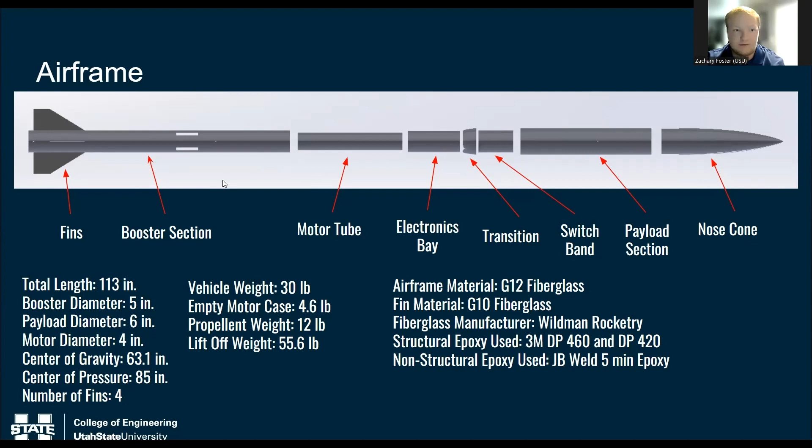And are you talking an actual 2-part epoxy with JB Weld, or those 2-piece putties that they sell as well? It's a 2-part epoxy. Okay, fair enough. All right, moving on to our fins. We'll show a picture of the fins later. Jorge, well, we can show them now. Jorge got onto the call.

Our fins are through the wall mounted. We machined slots into our fiberglass tube on a 3-axis mill to ensure that all the fins are aligned properly. The root chord of the fin is 12 inches long, tip chord is 4 inches long, the semi-span is 5 inches, and the total tang inside the airframe is 5.7 inches long. The tang goes the whole width of the fin, and it is sandwiched between 2 bulkheads to ensure that they don't move.

Internal fillets were done by drilling holes into the airframe and injecting the epoxy using a syringe type of tool, and then the holes were later filled with the same epoxy. All of our fiberglass components were first wiped down using soap and water, and then with acetone. Then they were sanded to 220 grit, and cleaned again with acetone right before the epoxy was applied.

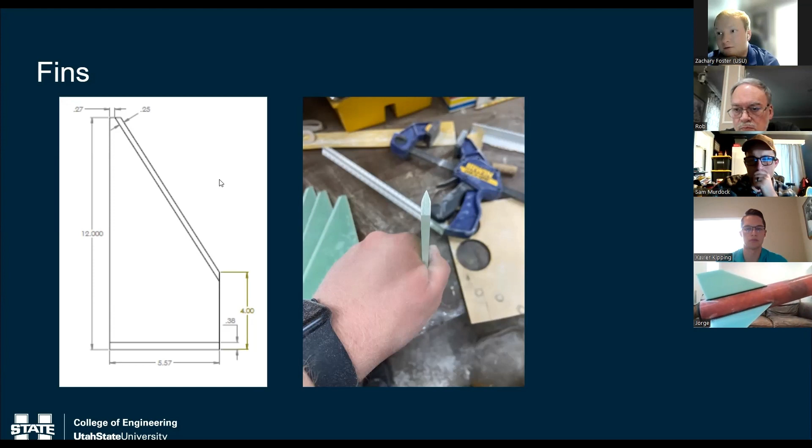Those are quarter-inch fillets on the outside, made of the same 3M epoxy we spoke of previously. There are two formulations: a non-sag formulation and a regular formulation, which are the same thing but one is thicker. The internal stuff was done with the less viscous mixture, and the outers were done with the non-sag, higher viscosity formulation. We didn't add any filler ourselves, but the manufacturer did.

Very nice, that looks good. Can I see the retainer please? The back end where the motor goes in, Jorge. Our retainer is an Aeropack retainer, a bolt-in retainer.

Have you tried to actually fit your motor case in yet? We have a loaner casing that we can use, but we haven't picked it up yet. We do have propellant in hand. We're just using a loaner casing because unfortunately our actual casing did not arrive in time.

Did you by any chance use an Aeropack retainer on your level 3 rocket? I did. Did you have any trouble fitting the motor? No, sir. I have found, having used a lot of Aeropack retainers, that when you tighten those bolts down it tends to shift the retainer a little bit out of line. So make sure you bring along to the competition whatever Allen wrench you'll need to loosen those a half turn if you need to.

So the bolts actually are not removable? The Aeropack retainer actually has a twist knob. If you could untwist it, Jorge, and show him the retainer, and take the cap off. There's a twist cap on the outside, and then the retainer is bolted onto the back.

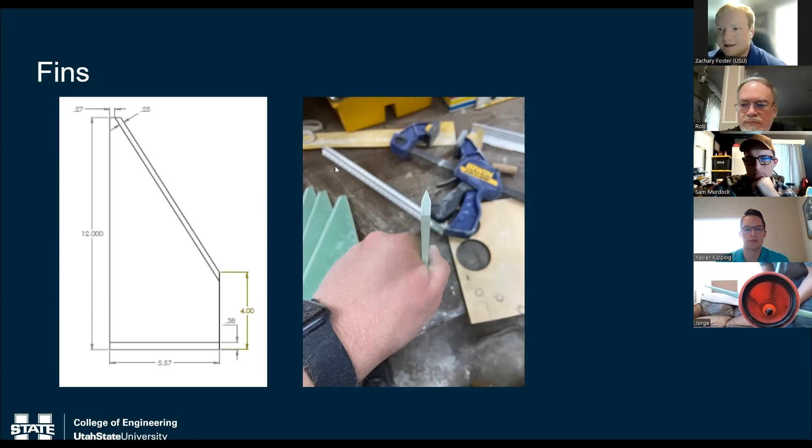For our fin flutter analysis, we just used the fin flutter boundary equation. I recognize there are other methods of calculating fin flutter boundary that probably give a little higher fidelity, and if you were pushing the boundaries you might want a second analysis. But since you're at 38% of your flutter speed, I think you're fine with this. Yep, that's the same conclusion we came to as well.

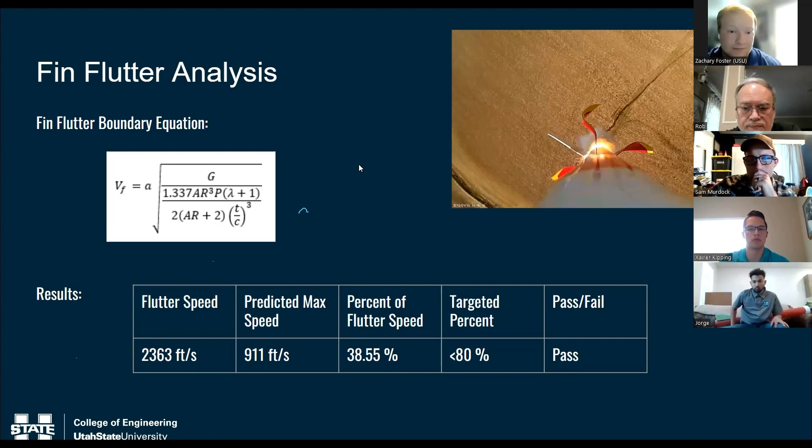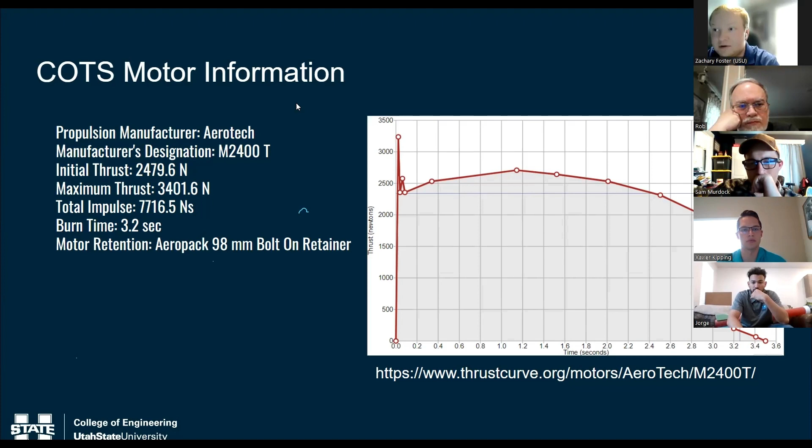We are using a commercial off-the-shelf motor manufactured by Aerotech. The specs are shown below: it's an M2400, a 98 millimeter motor. We do have our motor propellant. We are using a loaner casing, and hopefully our actual casing arrives in time, but we do have a backup in case that doesn't happen.

Going on to our flight simulation, we used OpenRocket as well, but all of our flight data came from RASAero. I used RASAero on my level 3 and was able to corroborate the data, getting within 5% of the simulated flight. So I have a high level of trust with RASAero, but as before, they are just simulations.

This is a nominal case. Our apogee is expected to be about 11,000 feet. Maximum velocity is 991 feet per second, maximum acceleration is about 10 Gs. Minimum stability is shown in the stability graph on the bottom right, and our minimum stability is 2.15, then after motor burnout it's just shy of 3. Our thrust to weight ratio is 9.87, and our rail velocity is 100.3 feet per second.

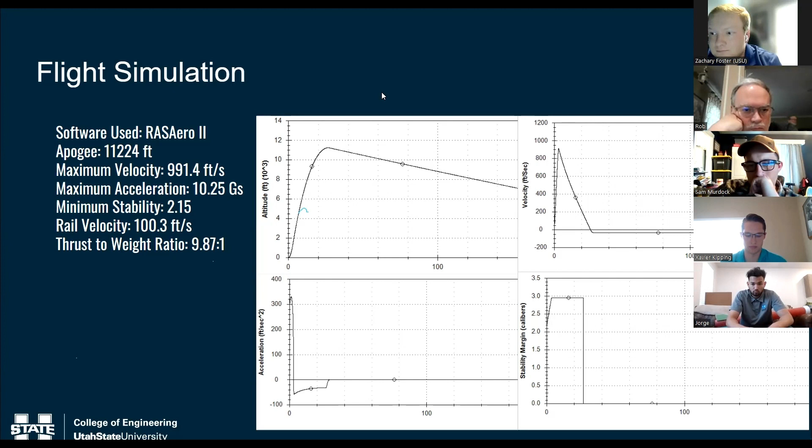Moving on to recovery. For our drogue, we are using a Rocketman 4-foot parachute. It's got a drag coefficient of 0.97. The drogue descent rate is about 60 feet per second.

We don't have the recovery harness installed into the rocket yet, it's in my storage unit, but all of our quick links are going to be 3/8. We are going to be using a swivel going from the shock cord to the parachute, as per the requirements from the DTEG.

Our primary flight computer is a MissileWorks RRC2 Plus. I've used this flight computer many times, it's my primary flight computer on all of my flights. It's very easy plug and play, very simple to wire.

The main parachute is also a Rocketman parachute, 14 feet in diameter, also with a drag coefficient of 0.97. The main descent rate is 14.5 feet per second. Our shock cord is rated to 2,000 pounds, made of Kevlar.

Kevlar was chosen because it has high strength, and it also can handle the ejection charges. So we don't have to worry, for example with nylon, about the shock cord melting due to the ejection charges.

Our secondary flight computer is also a MissileWorks RRC2 Plus, and our wiring diagram is shown below. Both systems are electronically isolated from each other, so they're fully independent of each other. We are using a Lab Rat Rocketry pull pin switch. I've used this on several projects and had good success with it.

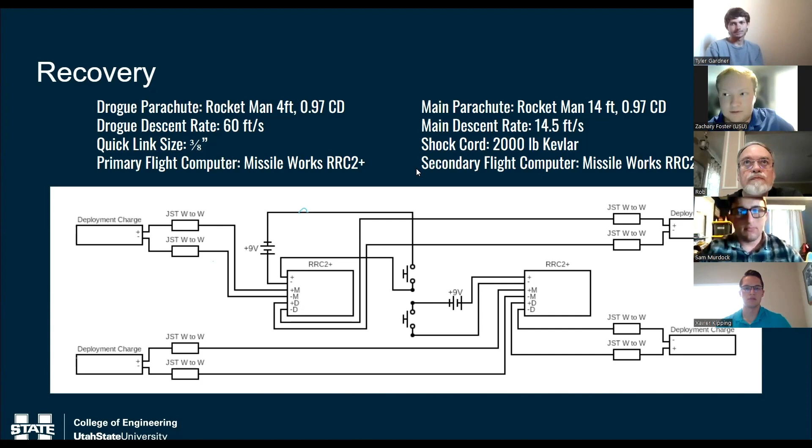Okay, I'm going to hand you off to Sam, who's going to talk about our altitude control system.

Because of how it's designed from a safety perspective, this should make sure that if we lose power, or if something unexpected happens, this won't really move or change in any way, since the stepper motor connected to the power screw shouldn't be able to move if it's not under power. The flaps are also designed so that it really shouldn't be able to move one side more than the other unless something breaks. Zach, if you move to the next slide, that has the factors of safety.

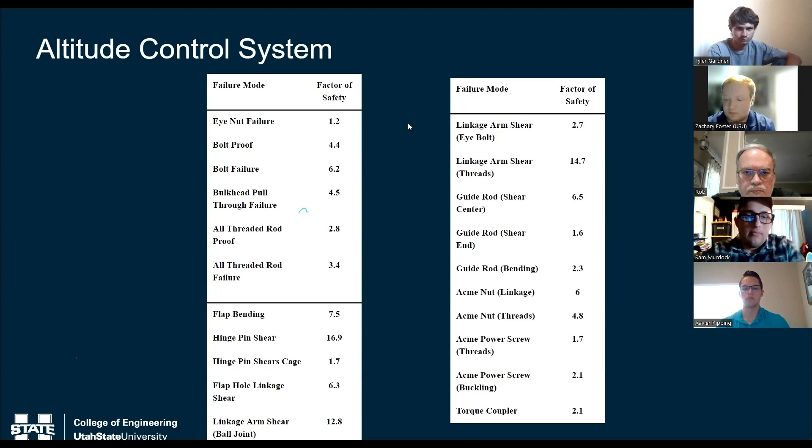We will compare which option would be best to get to our goal trajectory, and take that course of action. We'll have the motor do its thing, then take the new sensor data and keep looping that through, so we will asymptotically approach our goal as we get closer to it.

That's it for the overview of this. Do you have any questions on the ACS I can answer for you?

Yeah, go back to the first slide. There you go. The drogue parachute attachment, that's the top of the rocket, towards the pointy end. Yes, that's correct. So the flaps are opening up into the airstream instead of dropping down into the airstream. Correct. Good. Does your ConOps have the flaps retracting after they've been used?

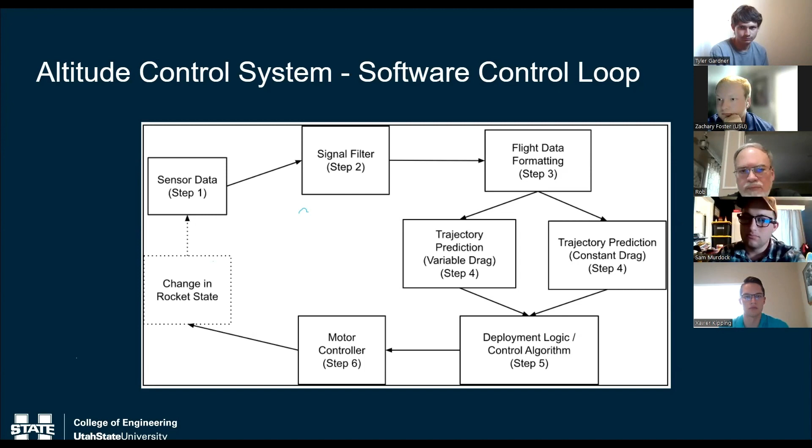Go over to your software page. There you go. Now, you said that this was still a work in progress. If it doesn't work out the way you want it to, do you have the capability of having the air brake system simply fly along during the contest and not deploy? Yes, we do. Okay, great. And that's not going to affect any other flight parameters or anything? No, it's an independent system, so this will be just fine if it just stays neutral. How are you powering it? With 4 LiPo batteries. Okay.

Have you heat tested those LiPos yet? I haven't tested these specific LiPos, but they're 2 to 3 times larger and more durable than I was planning. But my worst case scenario concern is not power or voltage. It's what happens when they sit out in that field for an hour and a half because the rocket before you CATO'd and there's a fire that has to be put out.

And now the sun has been beating down on them, and the interior of that motor mount, that airframe, is now 180 Fahrenheit. What are those LiPos going to do after being soaked in that much heat for that long? I've not tested that case, but we can test that before launch. Just something to consider. Now, I'll be honest, your air brakes aren't flight determinant. I'm just trying to think about some ways that you can make sure your rocket flies more successfully.

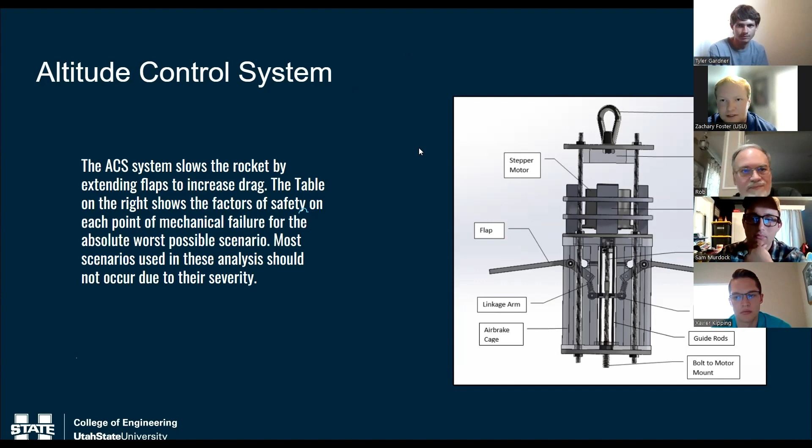Okay, we are about to get kicked off. So Tyler is going to have a link ready for us as soon as we're done. We've got less than a minute, so I expect any second now we're going to get kicked off. Or we can just go ahead and jump off now and then start back up under the new link. Okay, let's do that. Okay, thank you. Okay, there we go. All right.

Are there any more questions on the air brake system? Nope. Okay, I will turn you over to Xavier for our GPS tracking. So it's pretty simple. We're using the Big Red Bee GPS. We're putting it in the nose cone. The nose cone's currently black. If you want, Jorge, you can show the nose cone. Do you have the bay where it fits into? Can you take the nose cone off? That's not carbon fiber though, is it? No, the nose cone's fiberglass. Okay, good. Correct.

And so there's a 3D printed housing inside the nose cone that it fits into. And it'll be bolted in and secured that way. The antenna will stick out, and it has plenty of room because the nose cone's giant. Sure. And we'll paint it white just to make sure that it doesn't overheat, because Big Red Bee specifies in their specs that since they use a LiPo battery, you have to make sure it doesn't overheat. Yep. And then we'll have our own ground station using a software defined radio and software TNC.

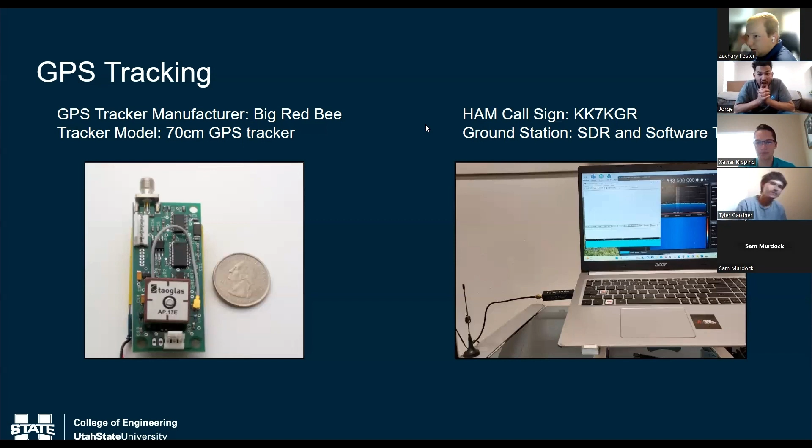All righty, guys. Good job. That went a lot better than I thought it